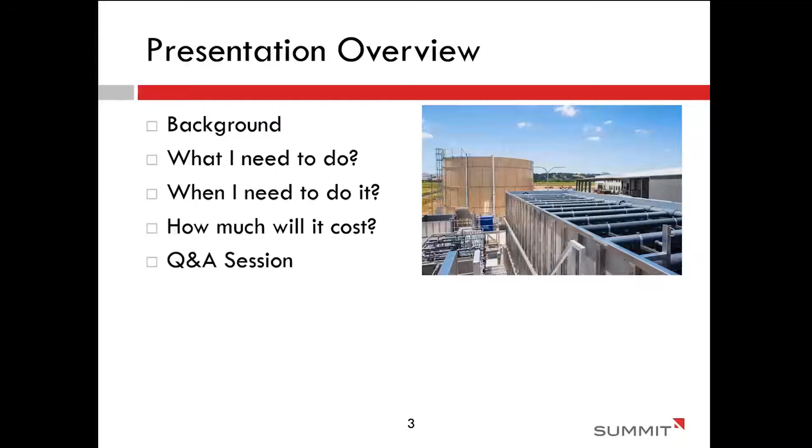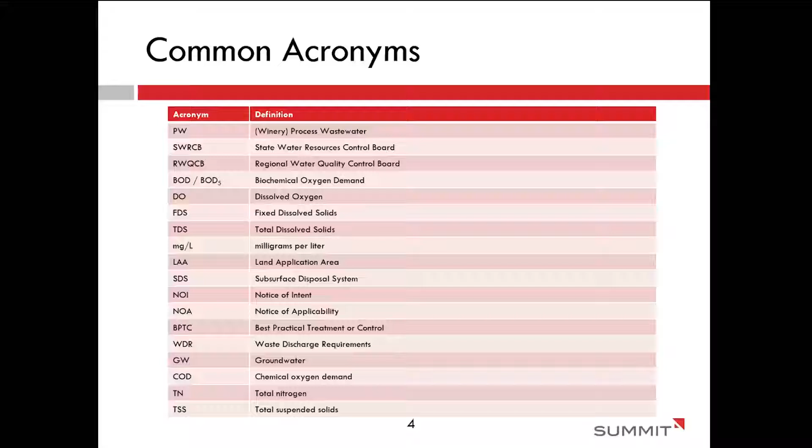So to start, one of the biggest things with understanding the impacts of this general order is knowing where you fall within the tier structure that the state has defined. So facilities need to have a good understanding of what their annual wastewater production volume is, whether that's calculated based on production volume, whether it's measured with flow meters. Somehow we need to define what that annual PW generation is or is going to be in the near future.

So the state has broken up the tiers into 4 different tiers with the addition of an exempt category. So if you produce less than 10,000 gallons of process wastewater each year, you're exempt and do not need to enroll in the general order. And then depending on if you're tier 1, 2, 3, or 4, that will define what your compliance might look like, what your monitoring and reporting will look like. So we need to get a good handle on what category you'd fall into.

Keeping in mind that your process wastewater volume also needs to include stormwater collected and sent to the wastewater system. The state wants to look at that cumulative volume of wastewater and stormwater. If you don't have flow measurement for all of the wastewater going to your pond or your subsurface system or to land application, we will need to understand where you're collecting stormwater so that we can estimate those volumes and help classify which tier you're in.

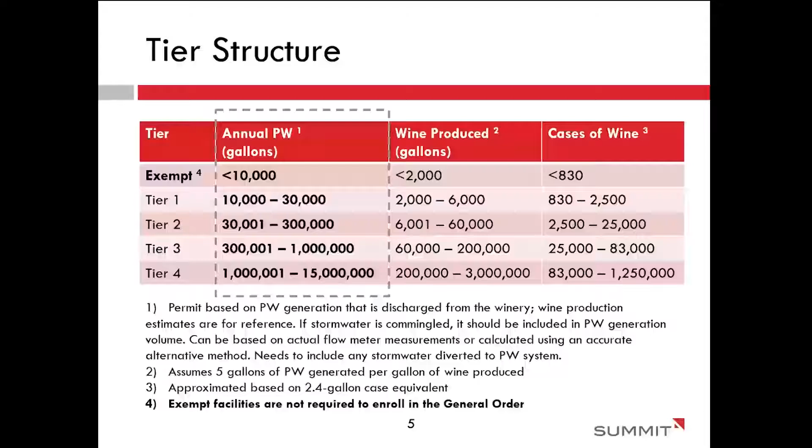Some facilities may find that the stormwater is pushing them into a higher tier than they want to be, so we can help you look at, should we put a canopy over this area? Should we do something to reduce that stormwater contribution to get us out of the requirements for a higher tier? And just emphasizing here that the state is only interested in the wastewater volume, right? But we've added columns on this slide to show the correlation to wine production and cases of wine, because most winery facilities talk in terms of wine production and or cases of wine.

So the next few slides, I'll talk about the typical type of wastewater systems that are regulated by this general order. So many facilities have existing ponds. I don't see as many new ponds going in, but they are still a feasible treatment option.

So for pond systems, the state is looking for us to determine the pond capacity and show what the capacity is by means of a water balance. So they want us to look at wastewater generated, evaporation out of the pond, precipitation into the pond, and just the overall wastewater water balance to determine if your pond has the capacity to accommodate a 24-hour 100-year storm and can handle the wastewater influent into that pond.

For existing ponds, the state will allow tier 1 and tier 2 facilities to maintain their ponds as is. If you fall into tier 3 or 4, you'll need to demonstrate that your liner meets permeability specs. If your pond was installed less than 10 years ago, you could provide construction drawings, geotechnical information to demonstrate that you meet that requirement. Otherwise, they'll require a performance test if your ponds are older than that. So you'll have to do geotechnical boring testing if you have a clay liner or perhaps a concrete liner. If you have a synthetic liner that's greater than 10 years old, you'll need to show that the liner is not leaking.

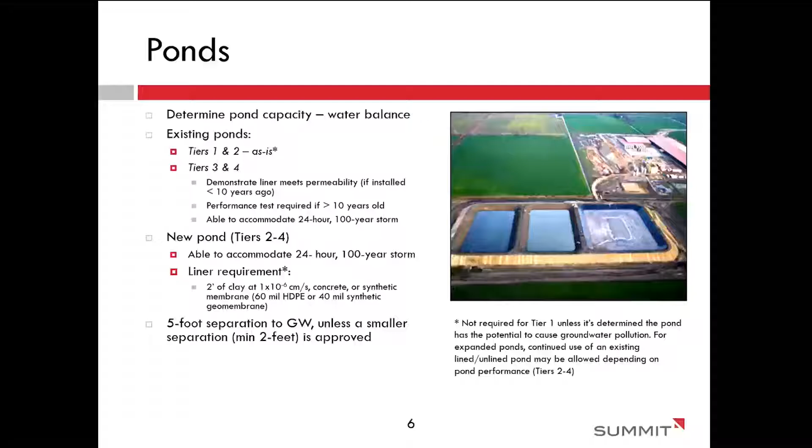For new ponds, similarly, you'll need to demonstrate you meet that storm capacity, the 24-hour 100-year storm, and you'll need to show that you're meeting the liner requirement with clay, concrete, or a synthetic liner. Another kind of new requirement that's different from many local jurisdictions for ponds is you'll need to demonstrate you're providing a 5-foot separation to groundwater, unless you're able to show that by providing 2 feet, you will not degrade groundwater quality. Those will be approved on a case-by-case basis based on what we're able to present to the state.

So from a pond or from a package system, or possibly for some facilities, you may go straight to land application. So land application areas are regulated by the general order, and the state does not have any specific hydraulic limits. They just ask for good irrigation practices. That's kind of an ambiguous term, but in our technical report, we'll need to demonstrate what the irrigation practice or cycle is for your land application area. You know, what's your total acreage? How is it split up? How many days will it take to cycle through irrigation of your entire land application area?

What the state is looking for is that you're meeting the BOD loading criteria and that irrigation cycle average limit is no more than 100 pounds per acre per day. One of the interesting things with the requirements of this order is that in a lot of cases, if you have the land area, you can irrigate raw winery influent on land if you're spreading it out over a large enough area. However, you need to demonstrate that it's not ponding or running off, it's not creating nuisances.

And in many cases, that water or wastewater is used for irrigation of vineyard. And so while it may be allowed by the state, it's not necessarily best practice from a vineyard irrigation and health standpoint. But we'll need to demonstrate that the BOD effluent limits will meet that 100 pounds per acre per day. The state will also be looking at nitrogen loading limits through a nutrient balance that's provided in the technical report. And I'll get into what the implications are if you're not meeting nitrogen requirements later on.

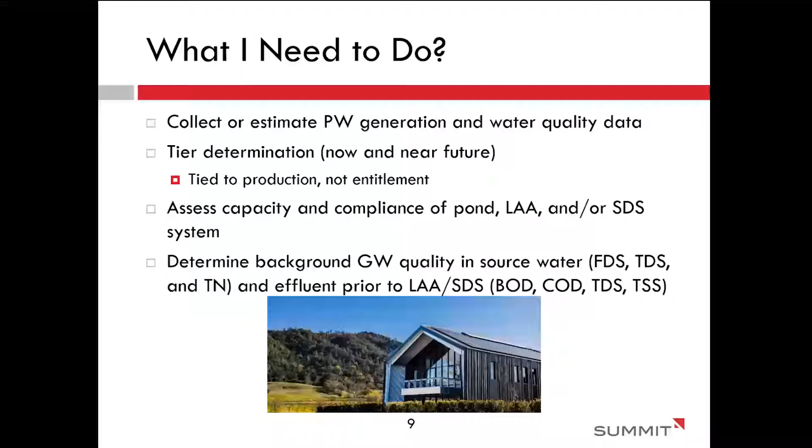And then similarly, we'd recommend determining your background groundwater quality and your source water and your effluent prior to land application. So the state is going to want us to compare your background groundwater quality to your effluent to show that you're not degrading groundwater quality. So the more data that we have ahead of submittal of the enrollment application, the better off you'll be in terms of just kind of anticipating what the state is going to do.

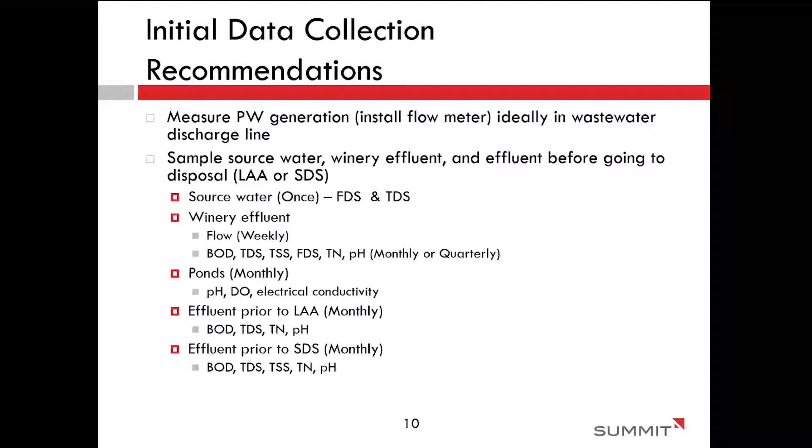Monitoring wells are another big component because the state is asking for us to speak to the groundwater quality, and we can't do that if we don't have monitoring wells. So most facilities likely don't have monitoring wells, and so there's going to be a portion of compliance that requires installation of these wells. And so how many and where? That's going to help you understand what the costs are. How many and where is going to be dependent on the type of system you have, how big it is, what the topography is like.

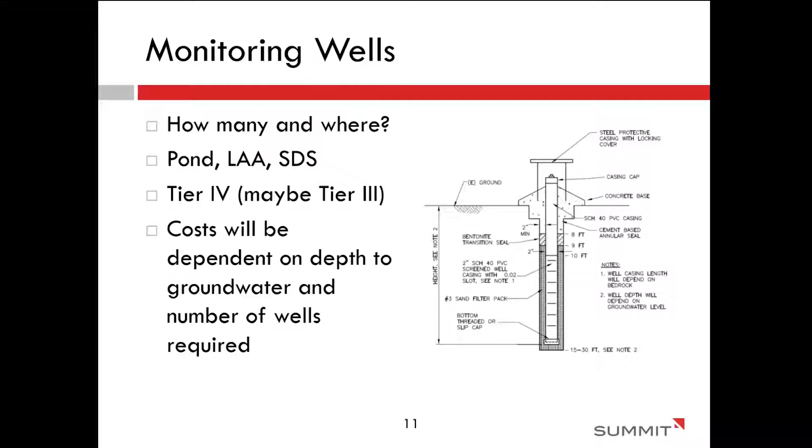So again, reach out to us with specific questions and we can look at your site and the layout and give recommendations on how we think the state will interpret the monitoring well requirement. And if you'll need 2, 3, 4, we can look up what the theoretical depth of groundwater is if there isn't geotechnical information, to better understand and give you estimates on what the cost to install these wells will be.

When do I need to do it? So that is the big question for a lot of people. So if you're an existing winery, you don't have any waste discharge requirements or any existing permits through the county or state for discharge of your wastewater, you need to submit an NOI and technical report by January 20th, 2024. And then your technical report must address how you're going to comply with this general order within 5 years of the state issuing the notice of applicability.

If you're a facility that has an existing WDR or a conditional waiver, or a permit through Napa County, or a local permit through an MOU, you need to submit your NOI and technical report by expiration of that existing WDR. If you have a permit through an MOU, that's a little ambiguous because you're renewing that permit annually. So I don't know if the state has clearly defined, does that permit expire annually, or how are they going to interpret that? I think that they have a lot of people they need to get enrolled before they come after the people that have those annual permits. But just letting you know that the requirement for enrollment of facilities, specifically in Napa, is a little bit ambiguous.

And kind of going on a segue, per Kim Withrow, the state and Napa County are still working out their MOU. The state has issued a draft MOU to Napa County. They provided comments and now they're waiting for the state to come back to them. So Napa County still has the intent of being the local jurisdiction or providing oversight for implementing the general order. And so they're going down that path, but as most things within the state, it's just taking a while.

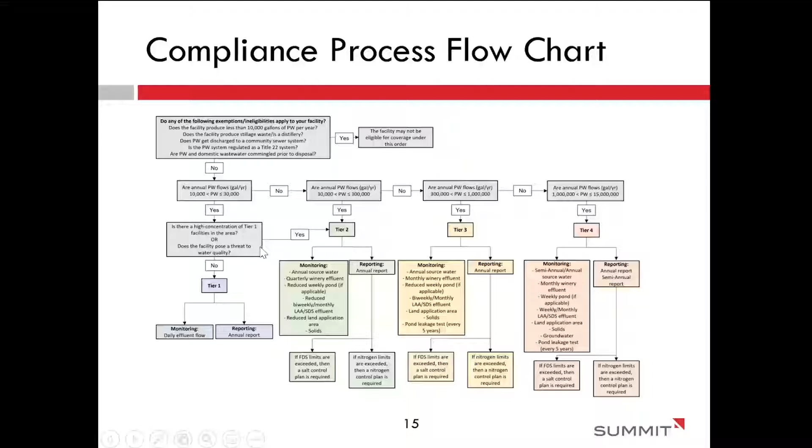For example, if you produce between 30,000 gallons and 300,000 gallons of processed wastewater per year, are you required to enroll? Yes, I'm a Tier 2. What does that mean? I need to monitor all of these constituents and provide an annual report. And if I have exceedances in FDS or nitrogen, then I may need to do a salt control plan or a nitrogen control plan, with subsequent requirements for Tier 3 and Tier 4. Again, we can send this out if that would be helpful for you.

Salt control plans: this will potentially be a requirement if you are showing exceedance of TDS, and it applies to land application areas or subsurface disposal systems. This new general order prohibits water softener regeneration brine from being discharged to your LAA or your SDS. They do, however, allow RO or boiler blowdown backwash to go to the wastewater system because it's not adding salts that then get into groundwater.

As part of the technical report and ongoing monitoring, you'll need to demonstrate that your source water plus your effluent is not adding more than 320 milligrams per liter of TDS to your source water, and you'll have to monitor that 2 times per year.

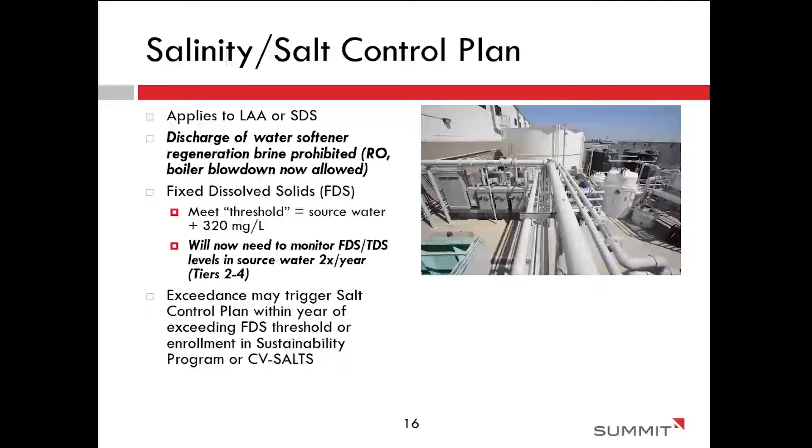If you do have exceedances of TDS, this may trigger a salt control plan within a year, or you'll need to demonstrate that you're involved in another sustainability program or CV Salts. CV Salts is a program within the Central Valley because of their groundwater and salt and high TDS level situation, so it would only apply to facilities in the Central Valley. But if other sustainability programs develop in other regions of California, that could be an option.

Similarly, nitrogen. There are nitrogen limits on the effluent sent to land application and subsurface disposal systems for tiers 2, 3, and 4. Your nitrogen levels in an SDS system need to be less than 10 milligrams per liter.

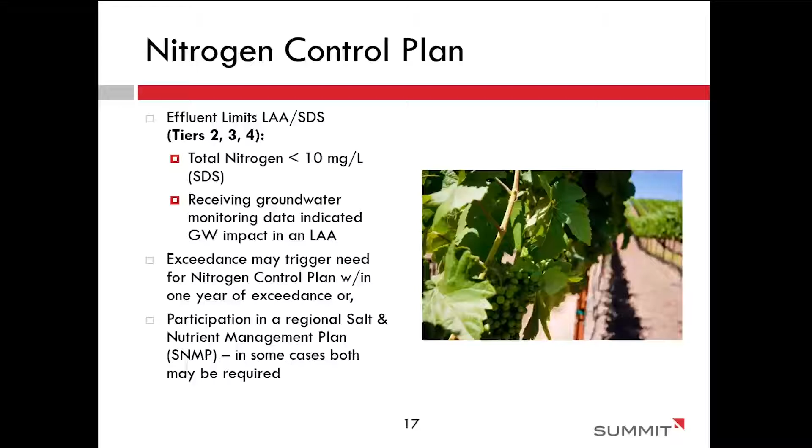For LAA, you need to be able to demonstrate compliance, and if there is a demonstrated impact to groundwater, then you may need to prepare a nitrogen control plan for the LAA. Similarly to salt, if you have an exceedance, an alternative to the control plan would be participation in a regional salt nutrient management plan. But at the present time, I'm not aware of any of those.

Compliance-wise, these are the steps for compliance. You submit an NOI and a technical report. The state is supposed to respond within 180 days. We'll see once people start applying what that actual response time is.

Once the state responds and hopefully issues their notice of applicability in response to the application, they'll provide the tier determination, the monitoring reporting plan or program, and an approval on your timeline for compliance.

After receiving the NOA, there's a variety of things that need to happen within a certain duration, which we've noted here. We can work with each facility to help provide guidance on what your checklist of items is that you need to do after you've received your NOA.

For example, within 180 days, for tiers 3 and 4, you need to have a spill prevention plan and submit your monitoring well installation work plan. And then there are requirements every year or so past that point.

Again, specifics apply to each facility, and we can work with you based on your tier to understand what the checklist of compliance looks like. Now, monitoring requirements.

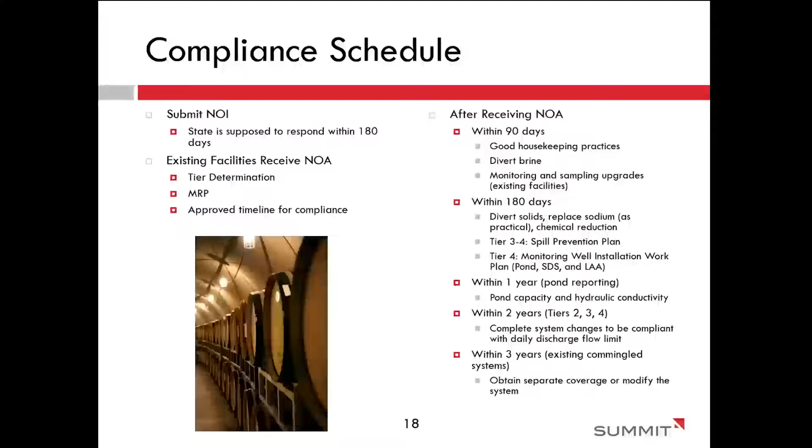Monthly, annually, biannually? And what's the method — is it just a calculation, a grab sample, or a composite sample? Quick note on grab versus composite: if a facility can take a grab sample, if it's allowed, which I'll get into, then that's just an easy grab sample out of your pond, or on the effluent side prior to land application or SDS.

For facilities that need to provide composite samples, in many cases we've suggested investing in a composite sampler. ISCO makes them, and there are other brands, but that way it's a calibrated sampler that takes a smaller portion of a sample at intervals throughout the day to create a representative composite sample for the day or whatever the duration needs to be.

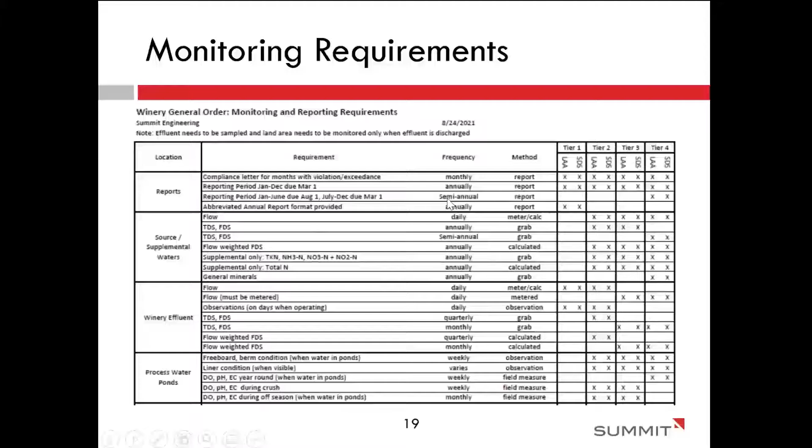In general, for monitoring and reporting: for groundwater monitoring, if you are requesting an exemption for your tier 3 or tier 4, and you want to request an exemption because you can demonstrate you're not degrading groundwater quality, you need to include that request in your application.

For overall reporting, if there's an exceedance of some kind, you'll have compliance letters. Otherwise, you'll have semi-annual reports for tier 4, and only annual reports for tiers 1 through 4.

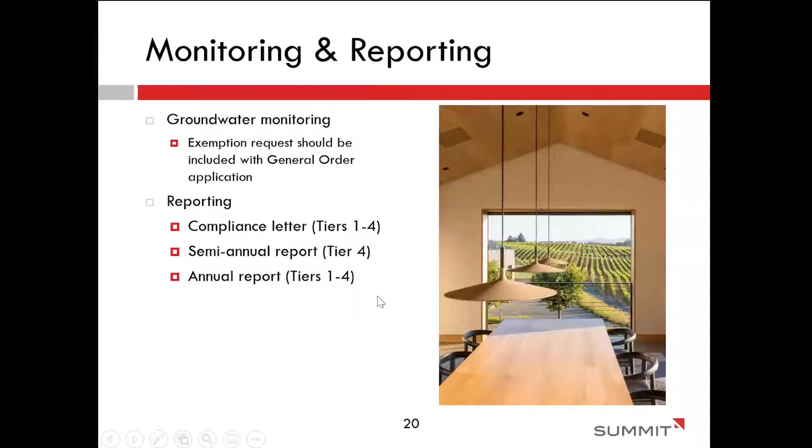How much will it cost? I think everybody is interested in how much this will cost, because it's pretty substantial in a lot of cases for facilities. So the costs include capital improvements — what are you going to need to do to improve your system to be compliant — and monitoring well installation if that's needed.

We can help put together estimates for all of the capital improvements, including groundwater sampling preparation. We included groundwater sampling as a capital improvement because it's an investment ahead of the O&M side—getting a handle on what your water quality looks like.

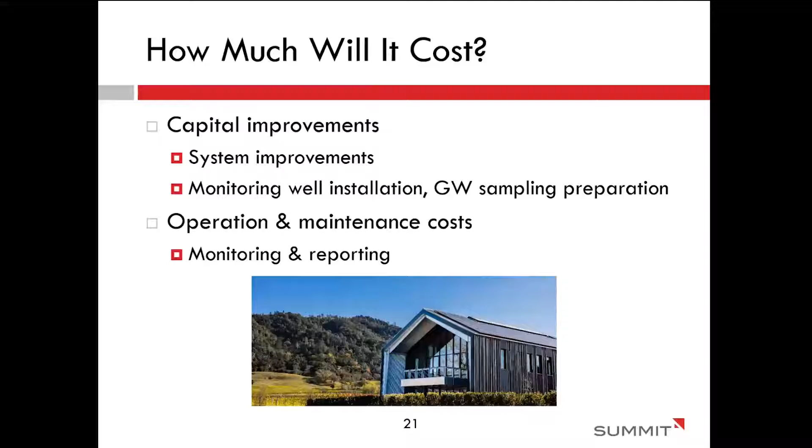Then of course there are the operation and maintenance costs—what it will cost your facility to do the monitoring, sampling, and reporting. Note that in future slides I'll give a couple of case studies, but those O&M examples don't include labor costs to operate or maintain a system. They're strictly related to compliance with the general order for monitoring and reporting. But labor is a consideration for a package system or pond—those O&M labor costs can be more substantial if you don't have someone in-house who can do that.

So here's the first example. We have a facility with an existing subsurface disposal system. They're a tier 3 facility producing 100,000 gallons of wine, equivalent to about 600,000 gallons of processed wastewater. Their daily flow is 2,500 gallons per day.

The system improvements they would need include a pretreatment system—this could be one of many things, we've given a few examples here—and they'd need to expand their SDS system. This might not be the case for all facilities, but in going through the hydraulic calculations, we discovered they would need to expand their system. There's also installation of flow meters and monitoring well installation.

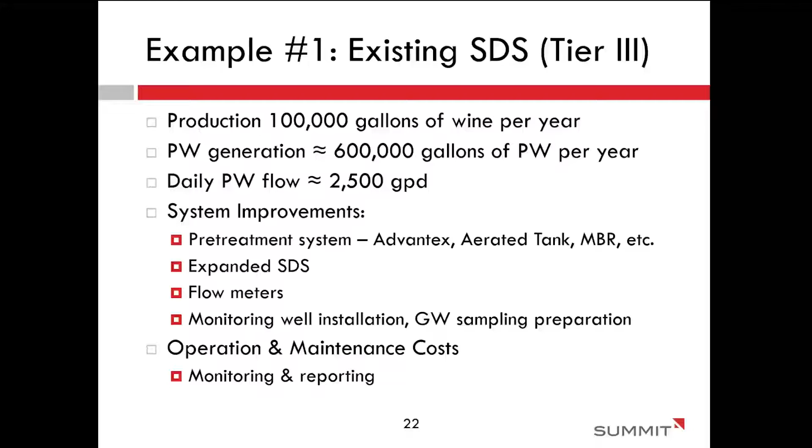And then there are the O&M monitoring and reporting associated costs. This table shows what all of those costs might be. I want to note there's a huge range for the pretreatment units. In this case, we looked at an Advantex AX Max, which is a textile filter for pretreatment, and depending on the loading for the pretreatment system, there's a huge variance in what that cost might be.

So the cumulative cost to improve the system to be in compliance is $666,000 to almost $1.5 million—quite substantial. Then there's the potential cost for all the additional plans noted on the right. For a facility with a pretreatment system like this, we've estimated the monitoring and reporting costs, and again it's substantial.

$25,000 to $33,000. One thing to note, as I mentioned previously: if you're providing a pretreatment system just to go into a subsurface disposal system, it might make more sense to use it for surface irrigation and have a beneficial reuse rather than put it subsurface. People often don't like leach field systems in their vineyards, so perhaps you can get away from that type of system.

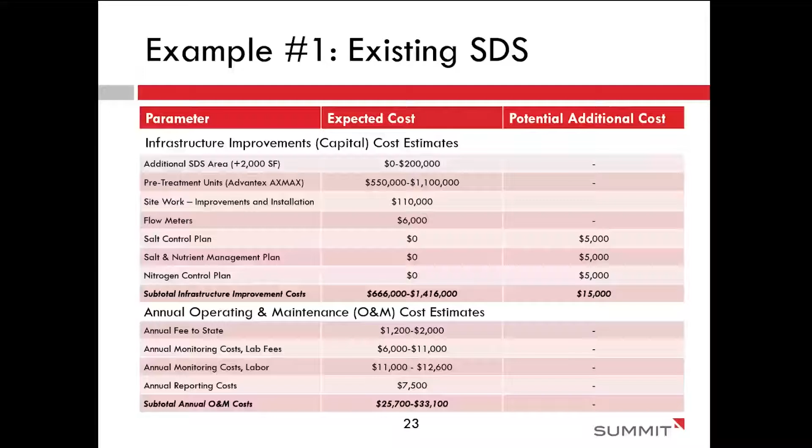Here's a second example. This facility has an existing pond, they're tier 4, producing 1.26 million gallons of wine. They're bottling juice on site, with a generation of 3.5 to almost 5 million gallons of process wastewater per year, and their daily flow is 40,000 gallons per day.

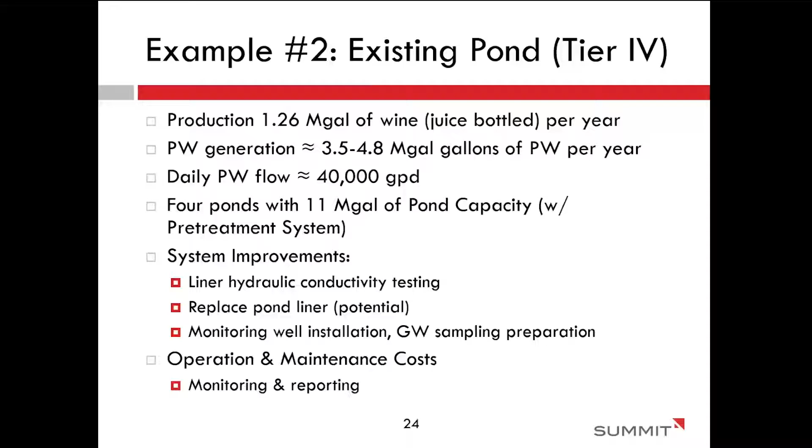This facility has 4 ponds with a total of 11 million gallons of capacity, and they already have a pretreatment system. Looking at this facility, they would need to do liner hydraulic conductivity testing for their 4 ponds, likely replace their pond liners, and do monitoring well installation around their ponds and in their land application area—plus the O&M costs for monitoring and reporting.

Here's the breakdown of potential costs. To put in the pond monitoring equipment, do the conductivity testing, and install the groundwater wells, we estimated about $350,000 for that investment, with the potential of $1.5 million to replace the pond liner—that includes desludging the ponds, grading prep, and lining the ponds. So if those ponds don't pass the hydraulic conductivity testing, there's a huge capital investment.

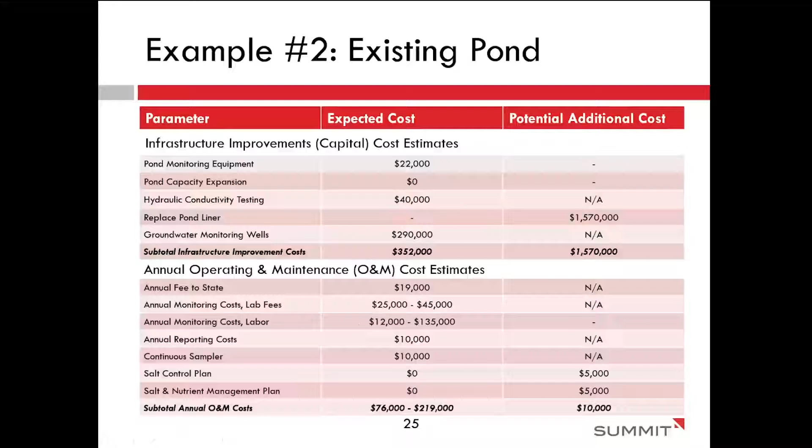And then the O&M costs are a bit more substantial. They're tier 4, and we've estimated it's about $76,000 to $200,000, plus almost $20,000 per year.

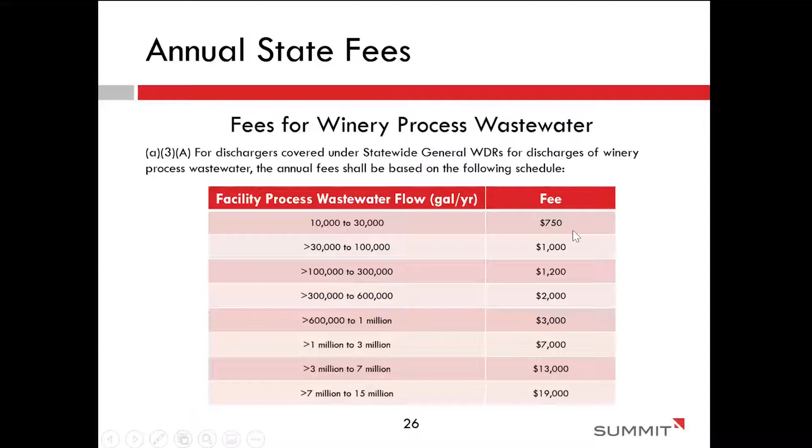Annual state fees: since the last webinar, the state has published the fees for the winery general order, and it's based on the volume of wastewater generated. It ranges, depending on your annual wastewater generation, from $750 up to $19,000 per year.

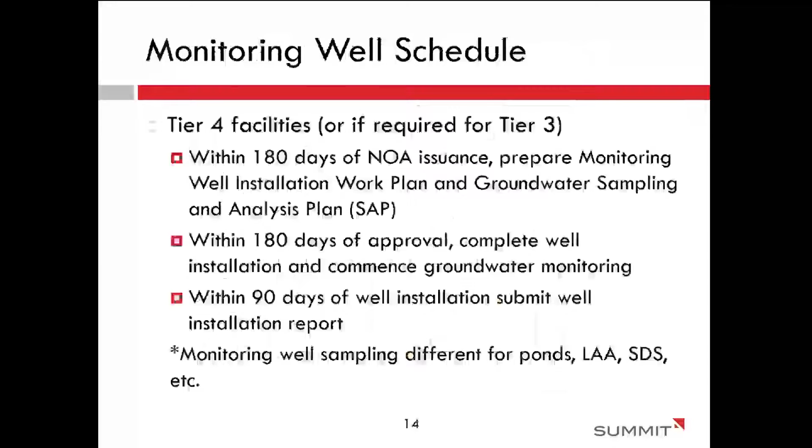All right. What is the setback requirement for land application areas and stream beds? Does this also apply to seasonal streams? Let me go back to that slide really fast. It's 50 feet to a well. This is for land application or subsurface disposal systems. Oh, sorry, this is just for land application area. I believe it's the same for subsurface disposal, but I will double check that.

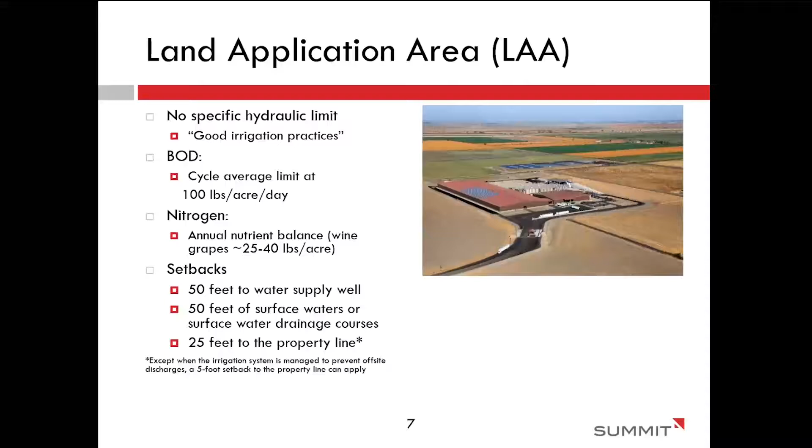50 feet to water supply well, 50 feet to surface waters or water drainage courses. I would assume that applies to drainage channels, just ditches as well. And then 25 feet to property line, unless again, you can demonstrate that you're preventing offsite runoff. Then it can be reduced to 5 feet.

Okay. Will a winery facility with a notice of non-applicability be impacted in the same manner by the general order? Different general orders. I think a notice of non-applicability is for stormwater, and this is specific to wastewater, winery wastewater. So if you are generating winery wastewater and you are discharging to land, or it's going back into the ground via leach field or other means, then you will need to be compliant with this general order, irrespective of that NONA.

Okay, this question is specific to Sonoma County, but I would imagine other people have similar thoughts. The question is whether Sonoma County has weighed in on whether or not they will allow hold and haul of process wastewater, thereby allowing the facility to be exempt from the general order. Good question, and we're still working on it. We're trying to get them to allow it because Napa County allows it, and I think it would make sense for a lot of facilities rather than invest a lot of money in infrastructure just to be compliant. So the short answer is no, but not yet.

And we've been in contact with Tennis-Wick. I know the Wine Institute's been involved in that discussion. Kendall Jackson's been involved with that discussion with Sonoma County to try to get them to amend some really antiquated code language.